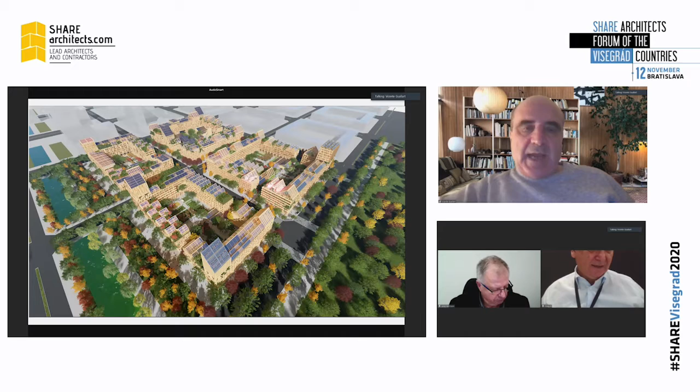Today I will focus mostly my presentation on the ideas behind this competition that we just won in China, the first massive timber housing project. The project was called the self-sufficient housing, and I would like to explain the ideas behind it.

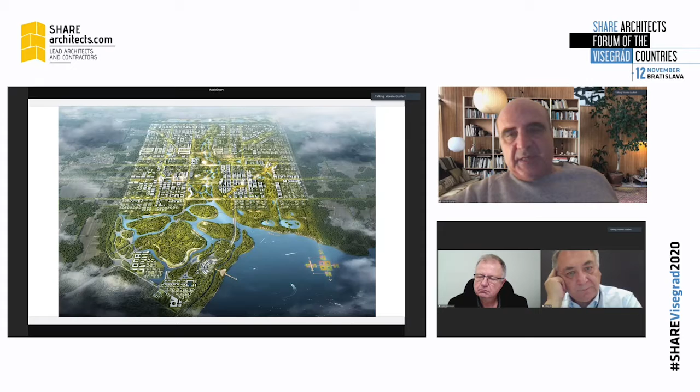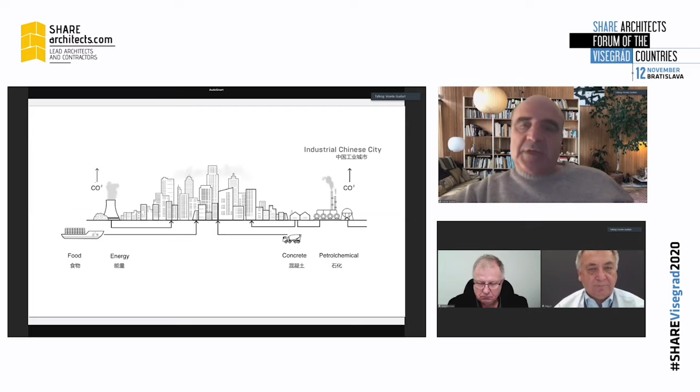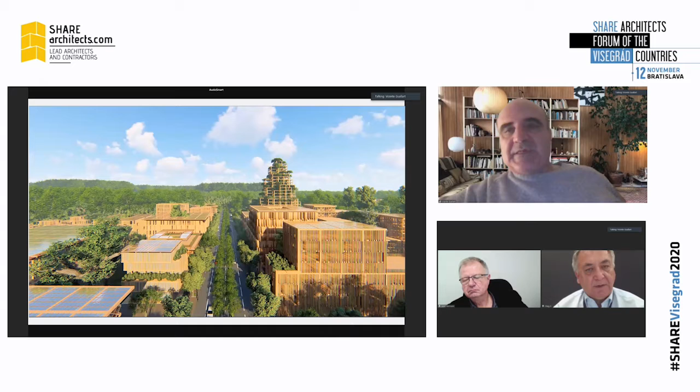This project is in Xiong'an, a new city near Beijing. I have been working in China in several competitions in the last years, and the interesting thing is that this is a new kind of urbanism they are developing in China, based on European urbanism, with grids and more walkable ideas. Because what they have been doing until now has been a segregated, modern style urbanism, a good representation of the industrial city that imports goods and produces trash and emissions.

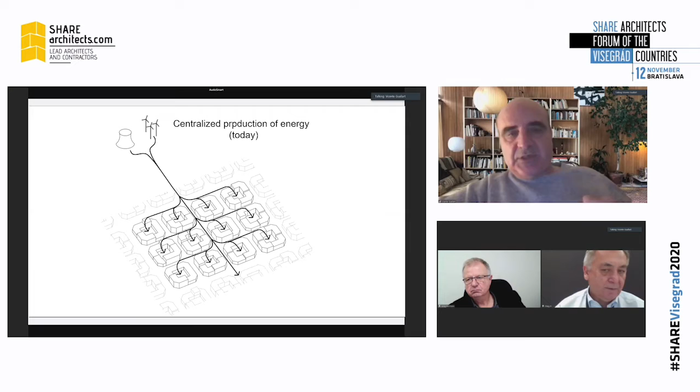The kind of project we have been working on in the last year is the idea of what we call biocities—cities that act more like forests: instead of emitting CO2, they absorb CO2, and they use renewable energy and natural materials that are around.

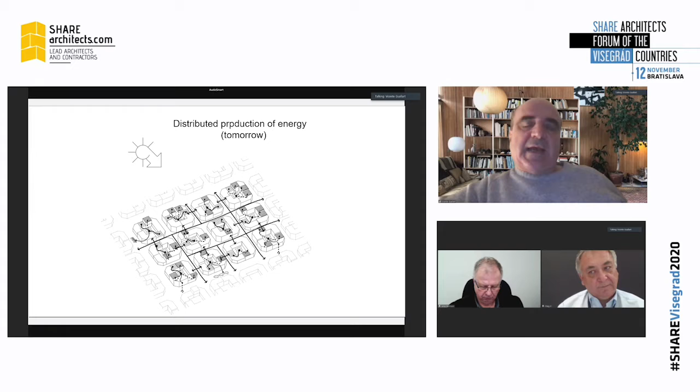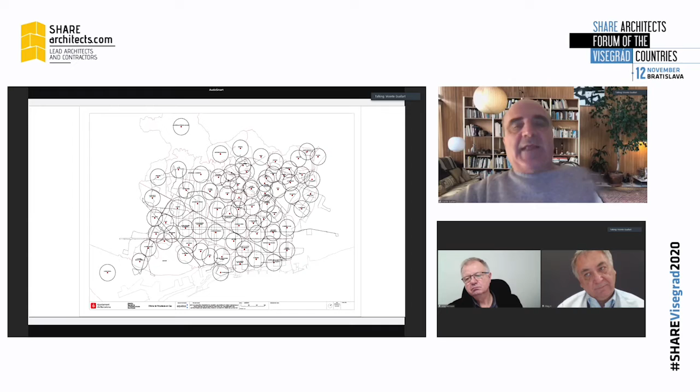When I was chief architect, we were working in Barcelona with the idea of defining a new mantra for the city, that it should be a self-sufficient city. Today we also import energy, but the idea is that we could use buildings to produce energy.

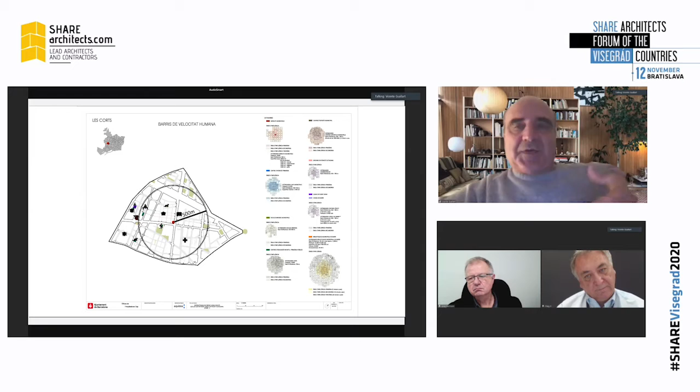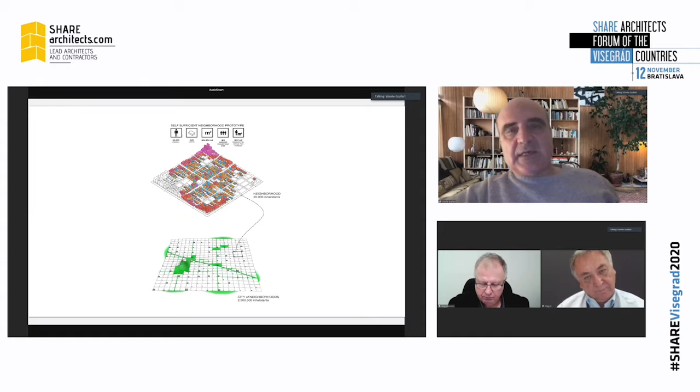Because the city of Barcelona, like many European cities, is already built, we should act like retrofitting our buildings, adding new layers like greenhouses on the rooftop. This drawing is from 2011—storing energy in cars didn't really exist at that time. Now it's developing, and we see it becoming a new standard, creating a new layer, a metabolic layer for the cities.

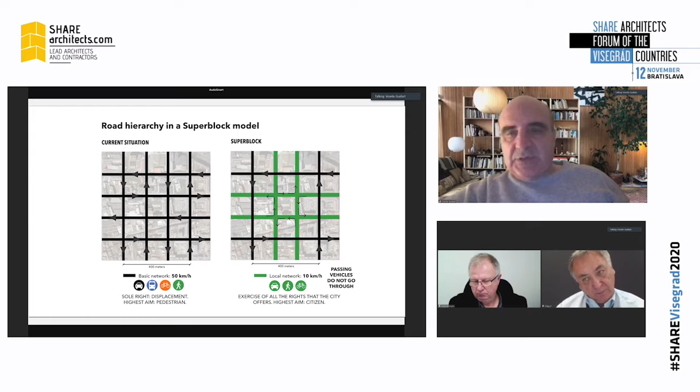Another important topic is that the traditional industrial city is a centralized model, and we were proposing to move to a distributed model. A perfect centralized city could be Moscow, Beijing, or Paris, where it's very clear what is the center and what is the suburbia.

In Barcelona, we were working with the idea of a distributed city that doesn't have a center but has many centers that are connected. This idea is based on a 500-meter radius, because this is the standard and this is all the facilities that the city has.

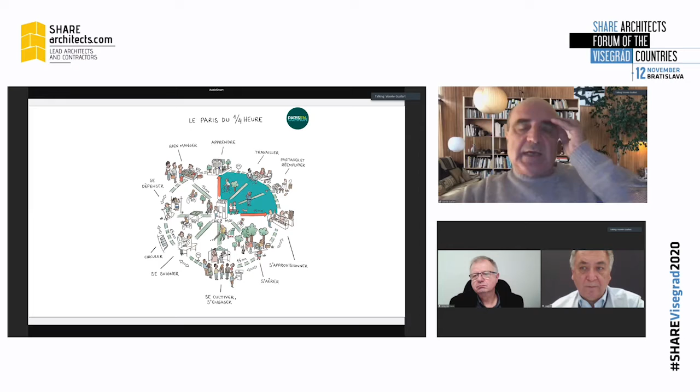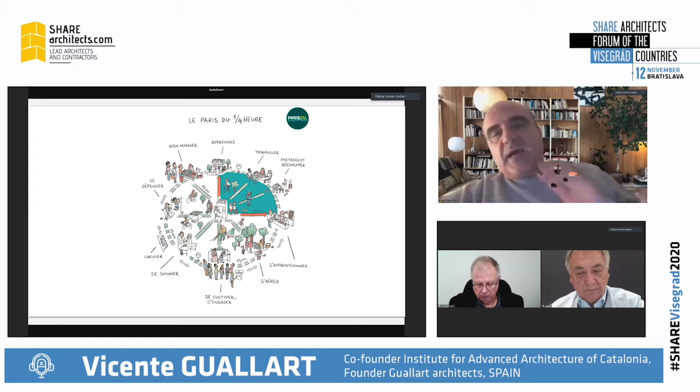The idea also was to apply this concept of the walkable city, organized with many centers, to public space—starting to remove cars from the city and developing green spaces through the so-called superblocks. In Paris, they have called this the 15-minute city. So the idea is that within a radius of 500 meters, which is what we are proposing in Barcelona, you can find almost everything you need to live, including public facilities and working places.

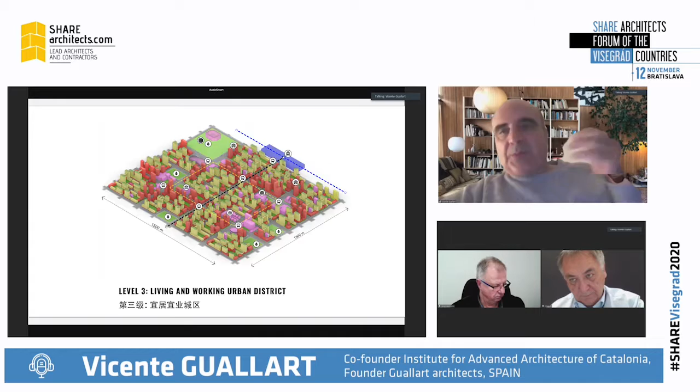Another important topic for some of the projects we developed in China is to develop mixed use and diversity in the city at three scales: in the block, in the neighborhood, and in the district.

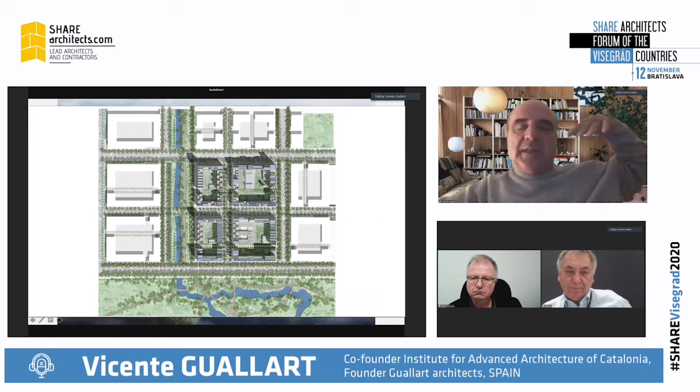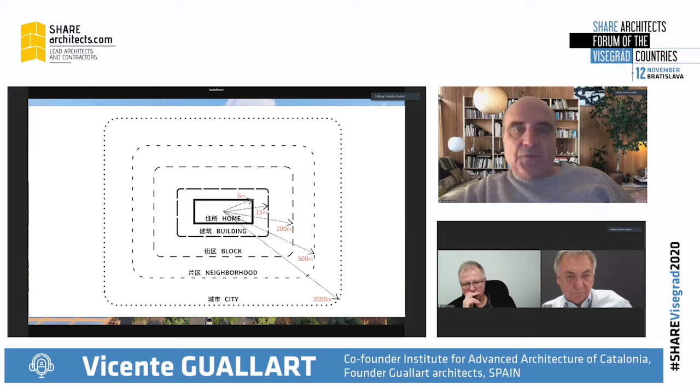Now going to our project in Xiong'an—this competition was for 4 blocks, and we wanted to develop a proposal based on the idea of the self-sufficient city, a city able to produce almost all the resources that people need to live. This includes energy, food, and many of the objects we need.

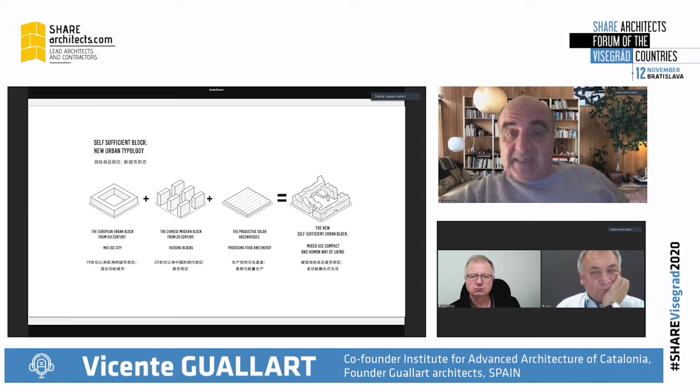We were also developing the idea of many scales of privacy, between privacy, sharing and public: home, building, block, neighborhood, and the whole city, each with a different scale of privacy. Our urbanistic idea is to mix the more European block, the Chinese taller buildings, and included productive solar greenhouses. This was the proposal we delivered with 4 blocks that had many greenhouses on top, including offices, sometimes villas, and sometimes greenhouses where we could produce food.

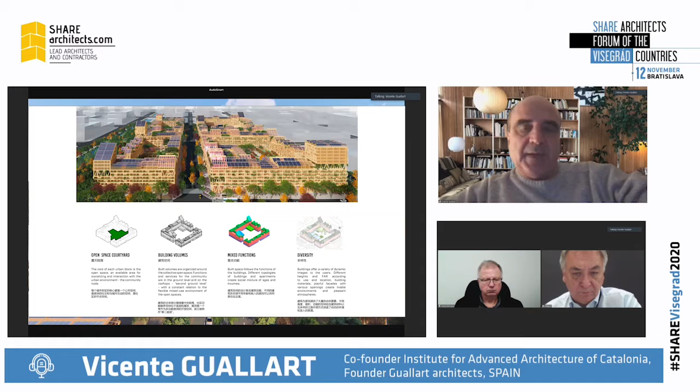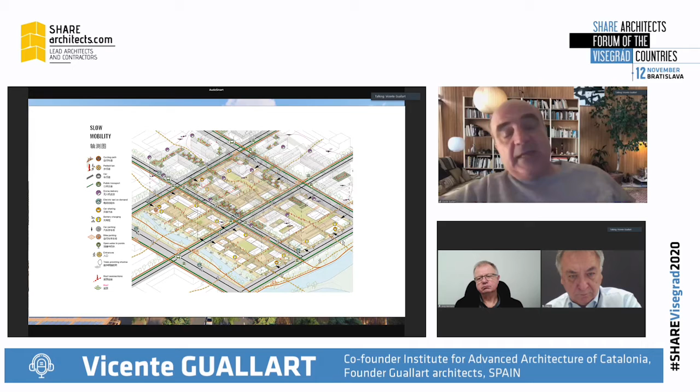We're also dealing with something new in China about slow mobility, which in Europe and many European cities we are trying to develop. We're trying to see how mobility will be in the future, with electrical cars or even self-driving shared minibuses. Today it seems we're introducing new technologies like this electrical skate, but what's interesting is that many of these ideas are old ideas.

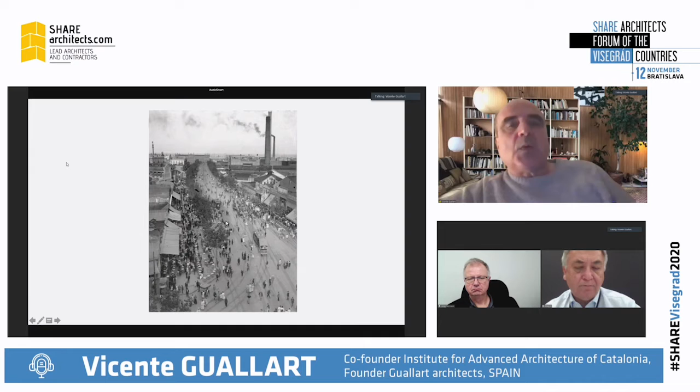Maybe all of us are at home right now — I am at home talking to all of you. We are doing Zoom, we are doing tele-education, and this is something that has arrived to stay for the future. So we need to think about how apartments function in this new kind of environment.

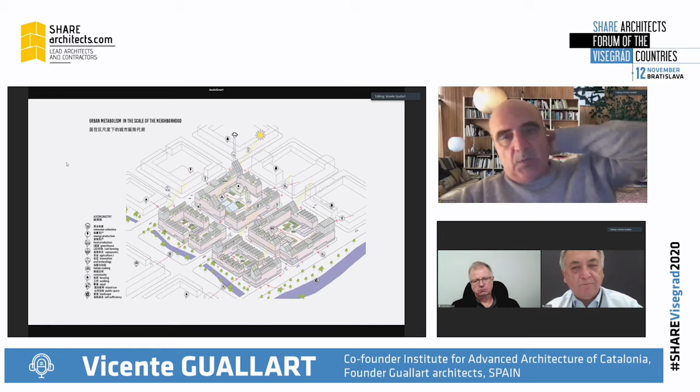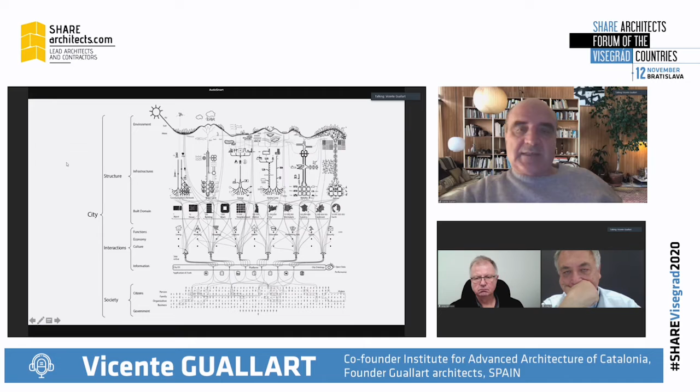We were also discussing how to include a metabolic system to produce energy, to have a holistic vision merging nature and all the information layers in the city, but at the building scale and home scale — like having applications that allow people to connect not to a friend in India, but to the person they don't know who lives across the corner.

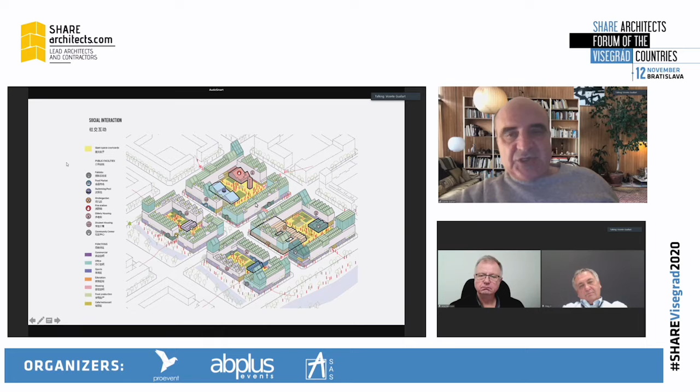We can create platforms to share resources, share food, share objects with people living in the community. Also the idea of having trash management in a smarter, more efficient way, and developing facilities like a swimming pool, a fire station, a kindergarten, and several other facilities — which, in fact, is something we've been doing in Europe throughout the 20th century.

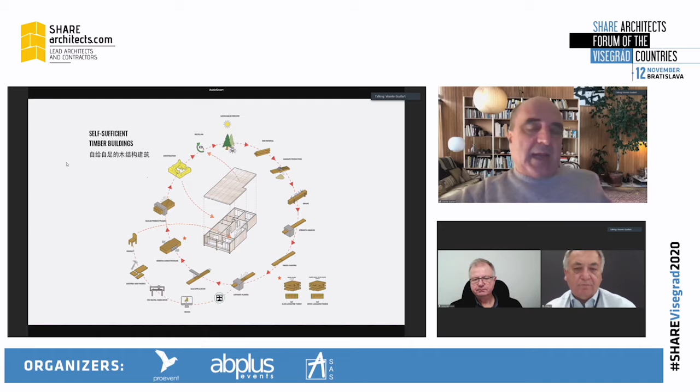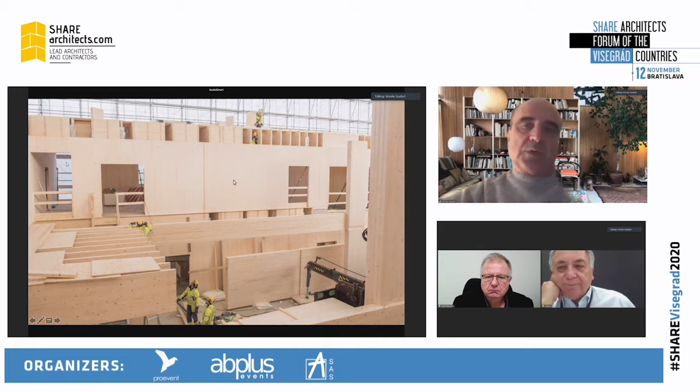One fundamental topic is wood construction, because now we are working here in Barcelona at our institute on new forms of wood construction. This is not traditional wood, but new and technological wood — this is a CLT panel, cross-laminated timber. This cross-laminated timber allows us to make structures that store CO2 instead of emitting it. These panels store the CO2 embedded in the wood, because when the trees were growing, they were storing CO2. This is the new form of construction that will bring us to zero emissions buildings.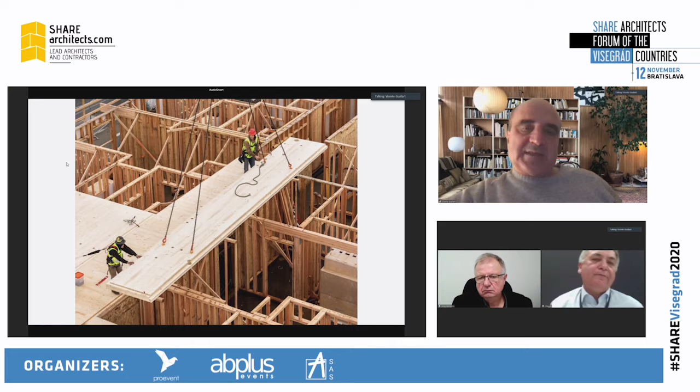So there are already samples on the left — this is the tallest CLT building in the world. And these are buildings we are starting to build in Barcelona that use CLT construction.

The interesting thing is that I am also the director, the founder, and right now the director of these Valldaura Labs. And we developed this master's program in advanced ecological buildings.

So all of you know Barcelona, that is here. But this is also Barcelona — a huge park attached to the city, a natural park. Our institute owns this forest, and we decided to start working with the forest because we wanted to see how we can merge nature and urbanity. This is the research place that we have. We have a holistic vision for the circularity of all resources, including wood, water, and food — so we produce food.

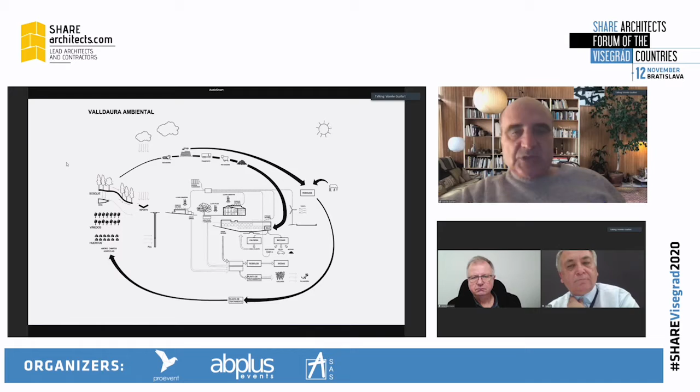Our students are making their own food and growing vegetables because they live there. It's an immersive program. We have a workshop where we can produce things, the Green Fab Lab, where we fabricate using laser cutters, 3D printers, and CNC machines, with students from all over the world.

We learn here the idea of making buildings that are almost like zero-kilometer buildings, using materials that are around. This is possible in places where we have wood, just as in other parts of Africa they've built cities with clay because that's what was around.

This is the forest that we own. Every year we do sustainable forest management, meaning we cut a few big trees, and from these trees we produce wood. You see here the trunks. We do traceability, taking a picture of every tree before we cut it, so we know which wood comes from each tree.

We bring in a sawmill and produce our own wood, which you can see here. We also have a small CLT press where we produce the panels, as you see here.

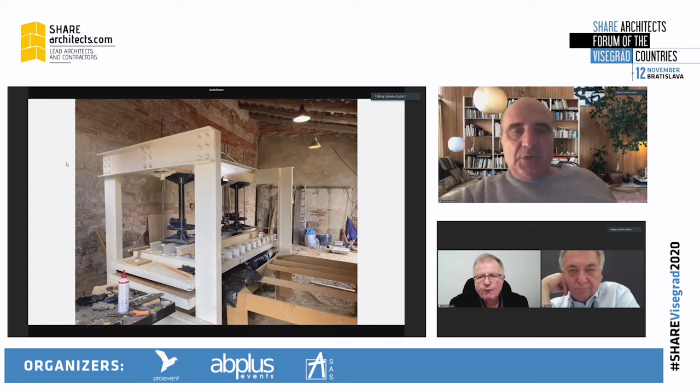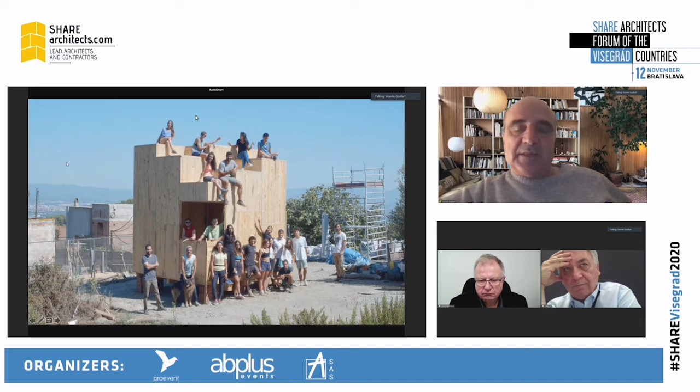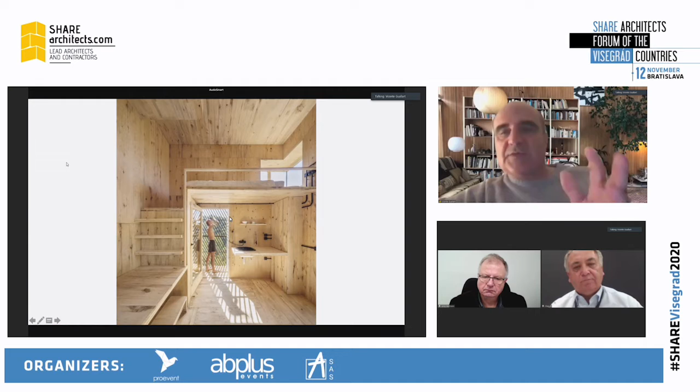Working with this carpentry, last year our students, during the lockdown, since they were living there as a lockdown research place, built what we call the quarantine cabin — a small wood construction with a burnt exterior, and a completely finished apartment interior, produced from zero, meaning from the forest to the construction. If a group of 15 students from different parts of the world can do this, everyone can do it, and we can do it at an industrial level to produce cities.

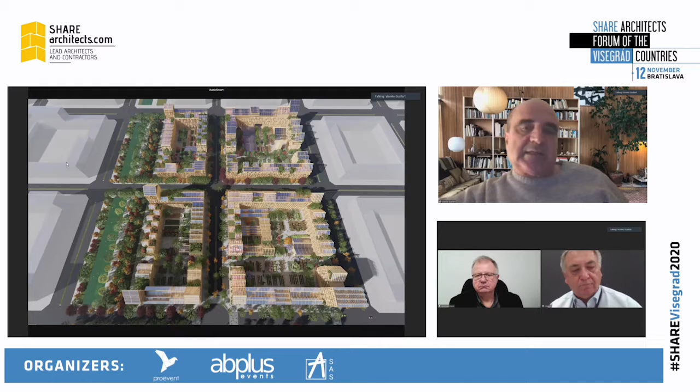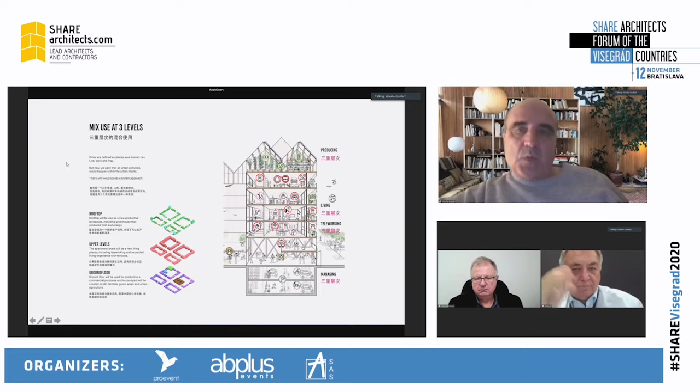This is how our building looks, with this structure and mixed use at three levels where people can live, work, and produce resources. You'll see now a plan that's very normal for Europe, not for China, but this is a building that could be almost anywhere in the world.

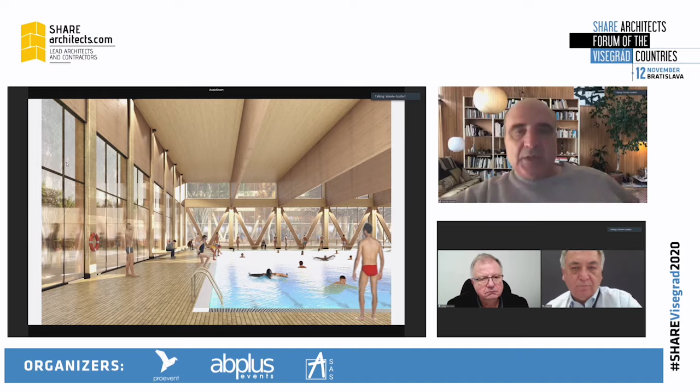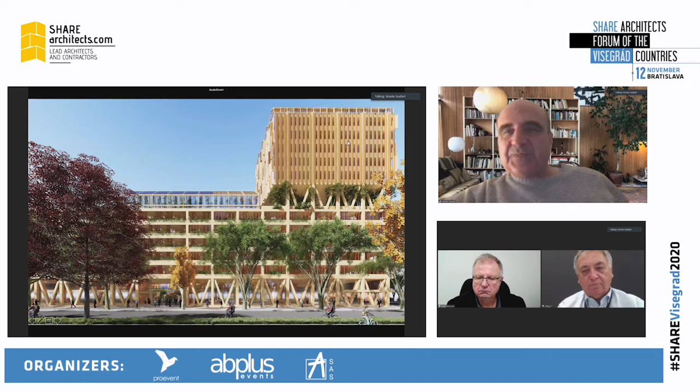In the center there's a swimming pool, following the tradition we see in Paris, Vienna, or Barcelona, with these facilities included with the housing. This is the courtyard where we have agriculture and some playgrounds on the facade, and some spaces for offices on top of the buildings.

Here we follow the basic idea of human self-sufficiency, where people need energy, food, and objects to live, as our ancestors did. This is the basic thing that they needed.

If they can produce this in Iceland, where they have ice, they can produce tomatoes anywhere. This is New York, the biggest rooftop farm in New York, and this is another sample of greenhouses.

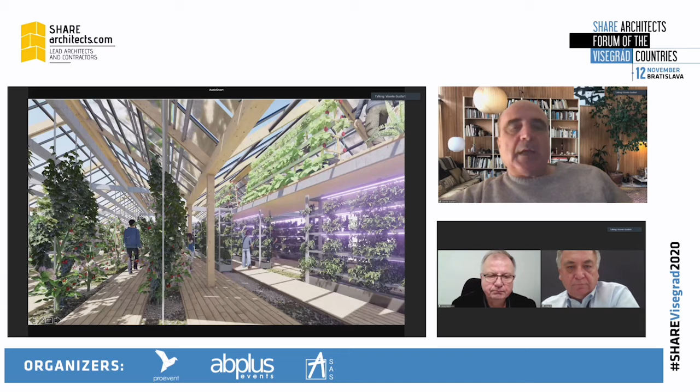This is LED farming. Our proposal includes rooftops where citizens could have space in every building to produce food, using both vertical farming like in Iceland or LED farming. If we produce food, we have more resilience and can face other challenges we may have in the future.

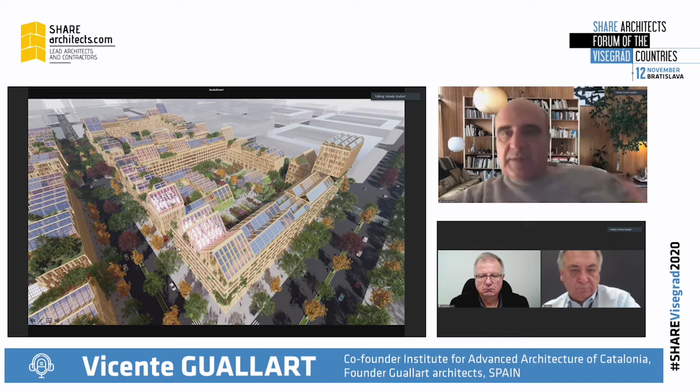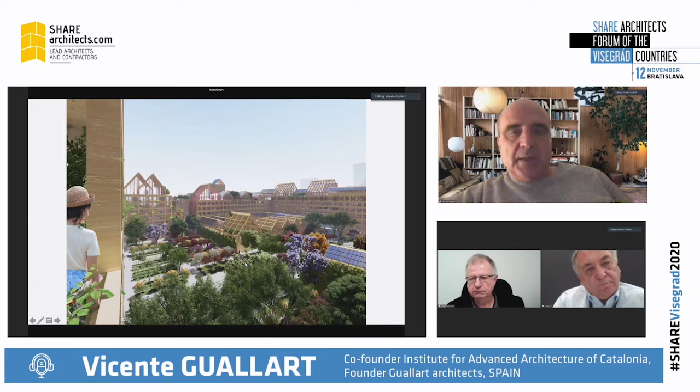Another topic is energy. In Beijing we need to put panels at 45 degrees, so we had all the roofs have solar panels, including the greenhouse, to produce almost 80% of the electricity this high-density community needs. This is the energy production in the rooftop with the courtyard, and there will also be a market for this food, and restaurants where people consume it.

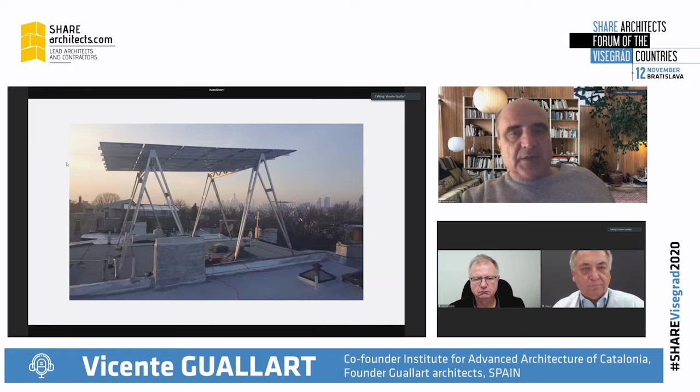Another topic is energy. These are some samples from Barcelona where we produce solar energy in specific structures, and this is in Brooklyn, another structure. The idea is having structures integrated into the building itself — not a structure on top, but the building having solar production integrated, which is something we already did.

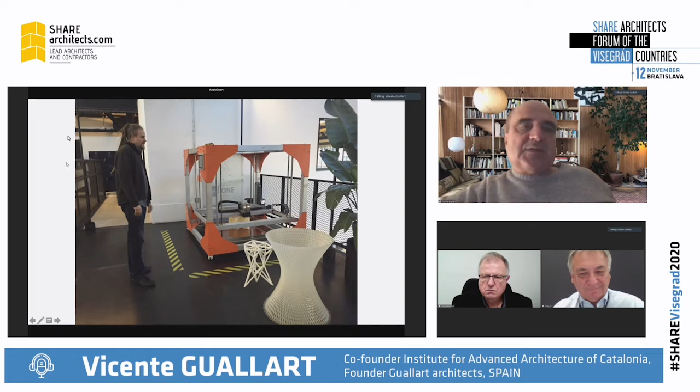And then the third thing is about digital fabrication. This is one big 3D printer where you can print one chair or one table only in one shot. This was relevant because in the first days of the pandemic, here there was a problem because the government wasn't able to buy masks, and everyone wanted to buy from China, but China wasn't delivering. It was really a crazy thing. This was the madness of the industrial globalized world where we lose the ability to make things.

What happened is that the makers, the young people using 3D printers, started to print masks. We ourselves were working with a hospital in Barcelona, producing elements that were hacking some masks from Decathlon. The fact is that in Spain, makers paying for the material themselves produced more than 700,000 masks that were saving lives, while big industry wasn't able to deliver the right products.

So that means we need to develop what we could call the digital reindustrialization of cities - how we bring back industry to the cities. This could be a sample where on the ground floor there are 3D printers where we can print objects for people or for a small business in the neighborhood. That means we don't need big industry to print a chair if we can print it using 3D printers, and so many other things.

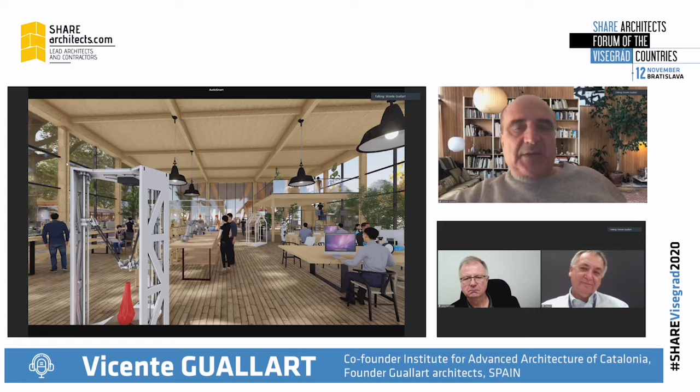This idea of designing in America and fabricating in China - obviously I don't support Trump because this is kind of idiotic nationalism. It's more about empowering communities by being able to produce things instead of thinking let others produce. We should bring back production to the cities - producing energy, part of the food, and part of the objects we need in everyday life.

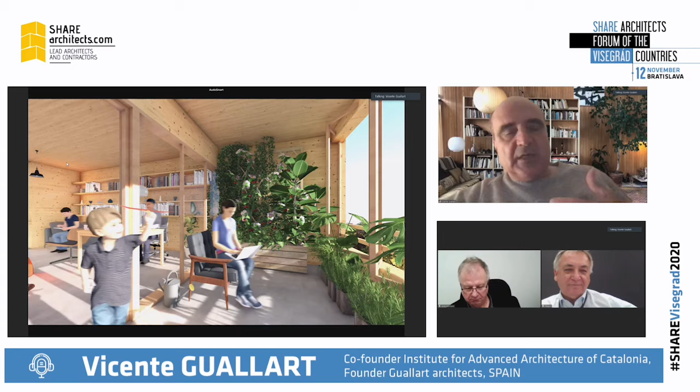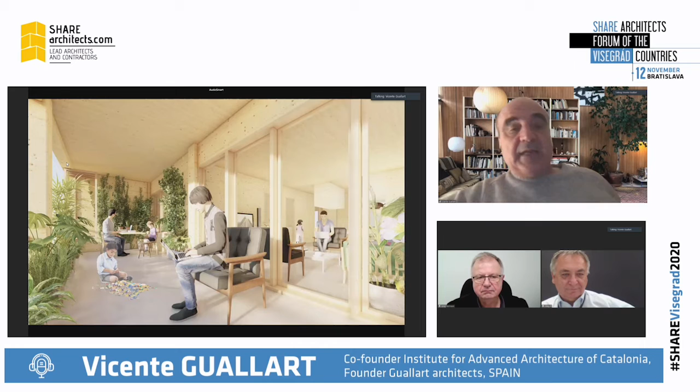The last thing was more about the interiors, the idea that we propose big terraces because terraces are places for expansion where people can work, rest, and also play. There were several typologies of housing, and then there was a big living room, and on this terrace is a place where you can also work and play. So it's a flexible space. We need this extended flexibility for our buildings.

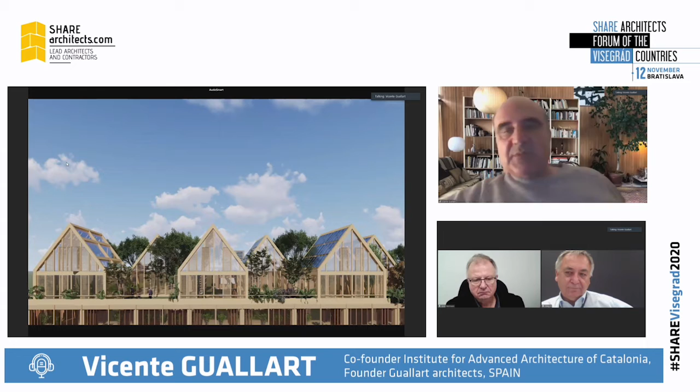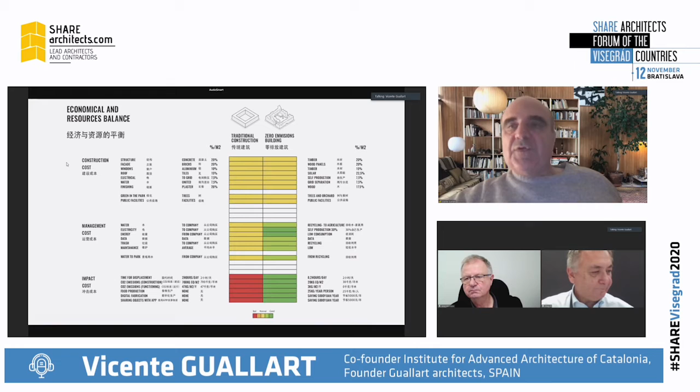These are some small villas, also part of the building. So yeah, that's the proposal we did with some economical analysis. That means maybe you need to invest a bit more, but in order to be less dependent on other potential crises we'll have in the future. This is our contribution.